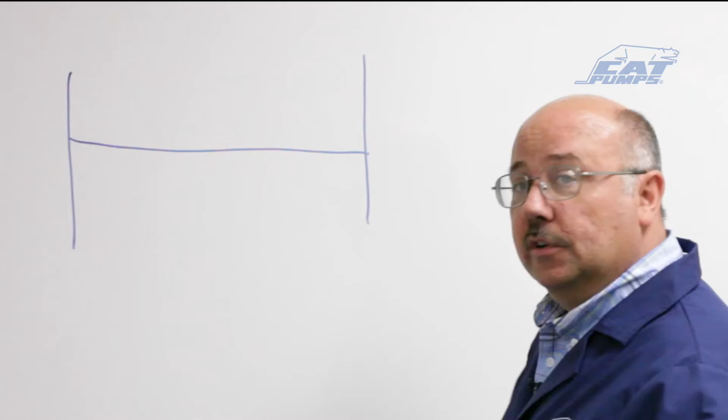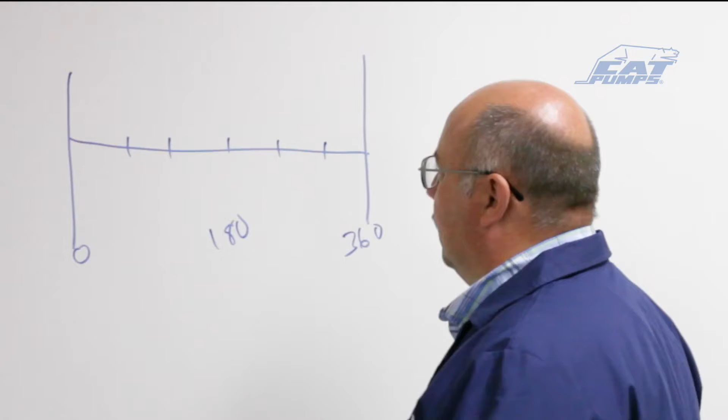I'm going to draw a representation of one revolution of the pump crankshaft. So we go from 0 to 360 degrees. This is 180 in the middle. Draw some marks every 60 degrees. And so we're going to look at the first plunger.

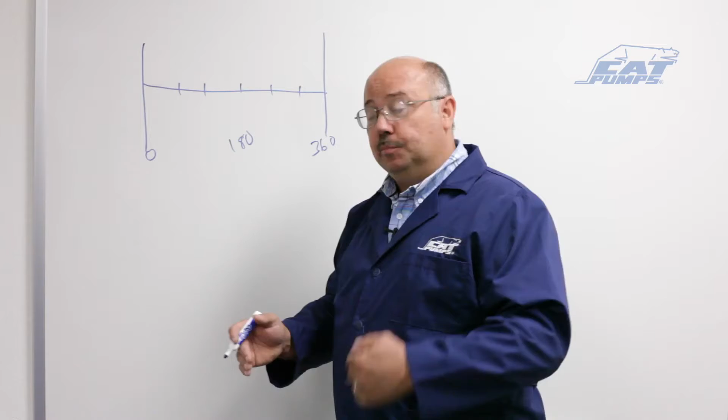When a plunger starts out on a reciprocating pump, it's at 0 speed. And then halfway through its forward stroke, it's at its maximum speed. And at the end of its stroke, it's at 0 speed again. So the curve of the output will look like that. And that's the forward part of the plunger.

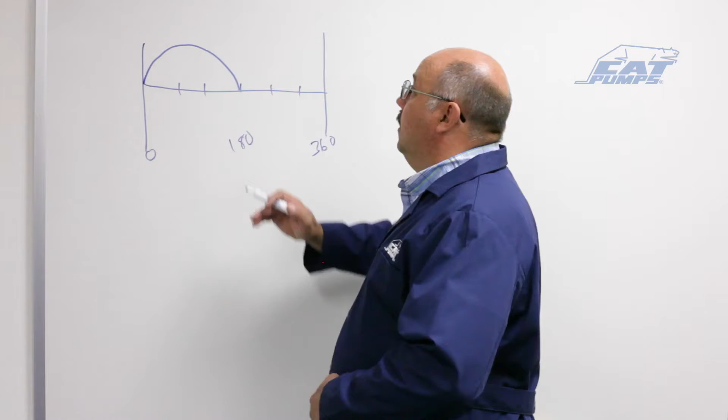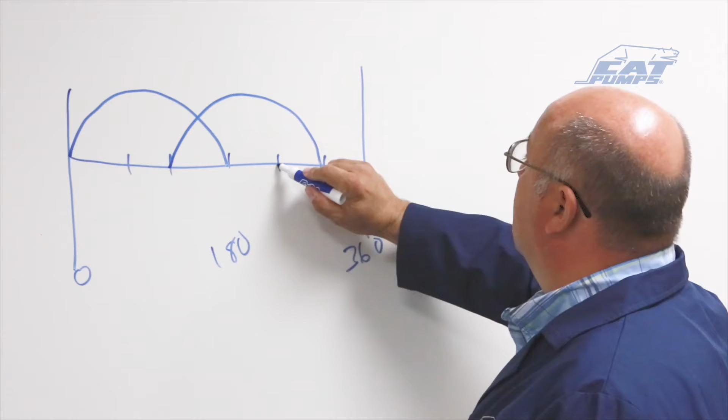This is the return where it's bringing fresh water into the chamber. And we're only interested in this scenario with the output of the pump. So one plunger has output like that. Then let's look at the second plunger. It starts 120 degrees offset and has a similar output like that. Now we'll look at the third plunger, which starts 120 degrees after that and has a similar output. That's what the output of a reciprocating triplex pump looks like.

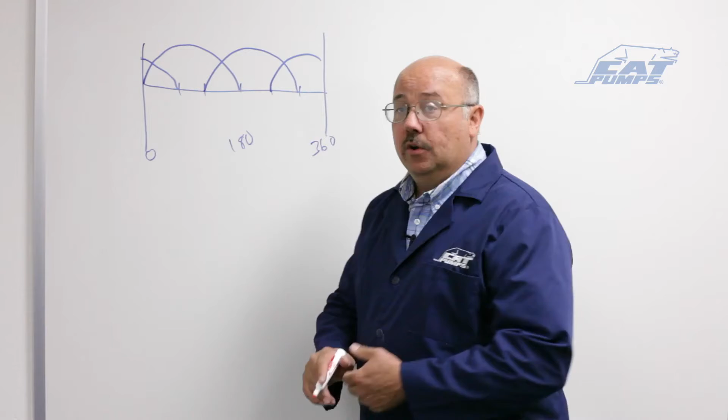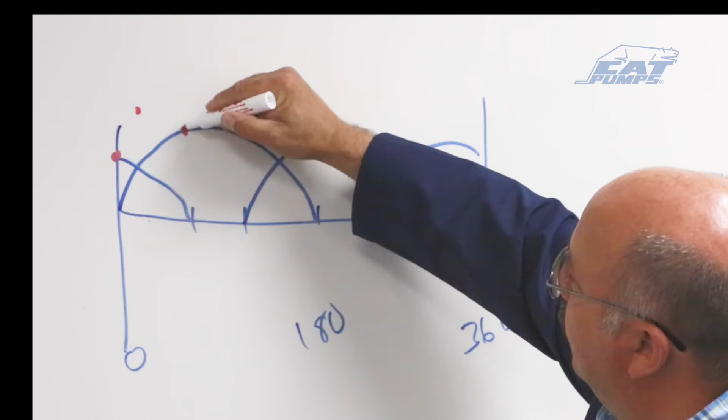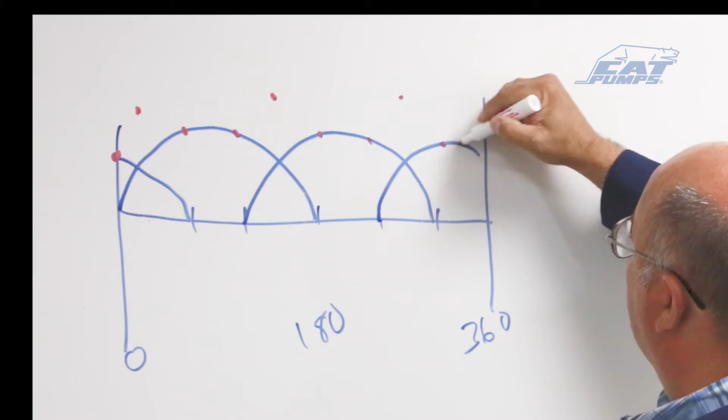Now, to get a true picture of what's happening, we're going to add what's happening at each moment along here. At this point, only one plunger is going forward, so there's this output. At this point, two plungers are putting out the same amount of output, so we add those. Here, only one is putting out, so it follows this curve from there to there. Again, here it adds. Follows along, adds, and follows along. So the output of the pump actually looks like this.

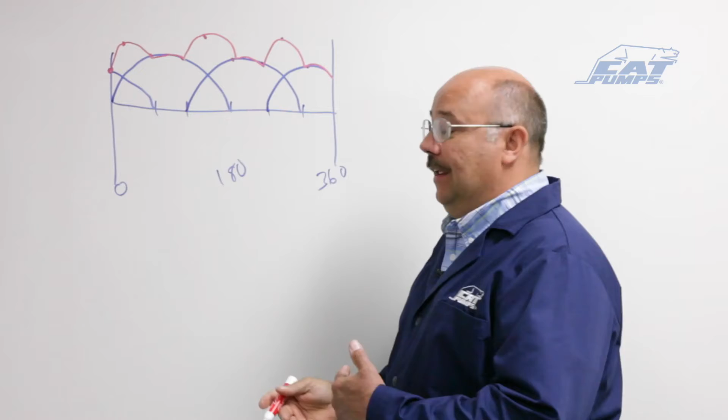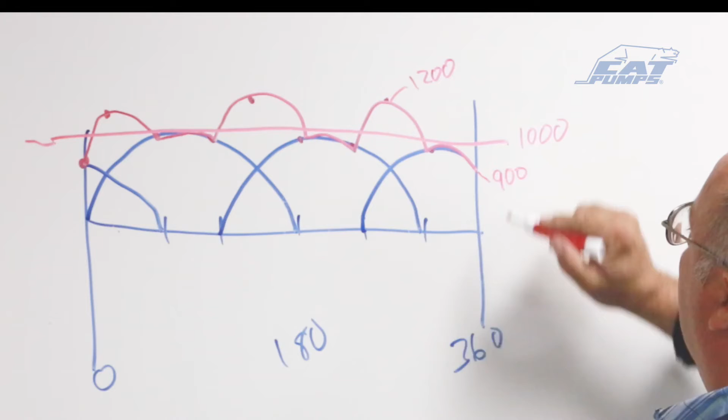As you can see, that is a pulsation curve, because if we're running at 1,000 psi right through here, we're seeing peaks up here of possibly 1,200 and valleys down here around 900 psi. So in one revolution of a pump, we have 3 peaks up to 1,200 and some valleys down here at 900 psi. That's very erratic pressure. And it also represents the flow coming out. And so it's very erratic. And what we want is something a lot more smooth than that coming out.

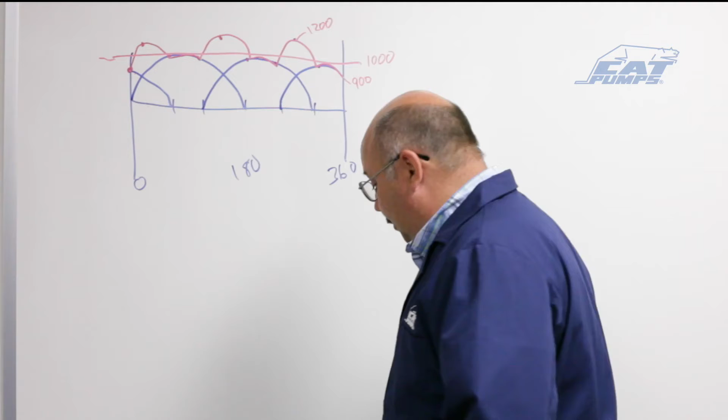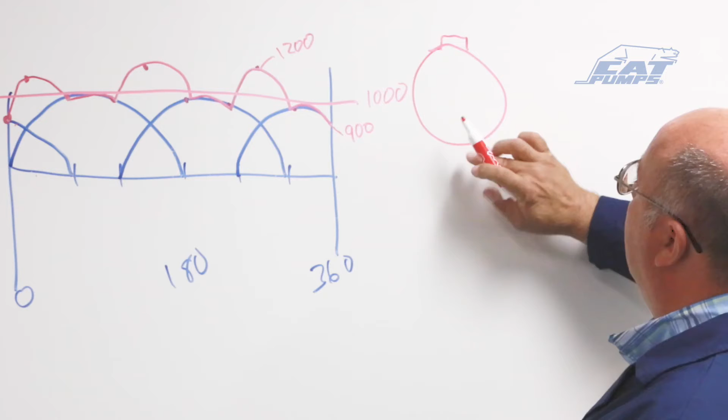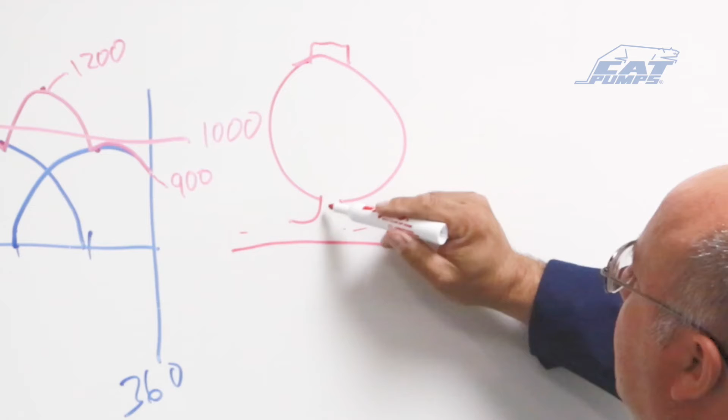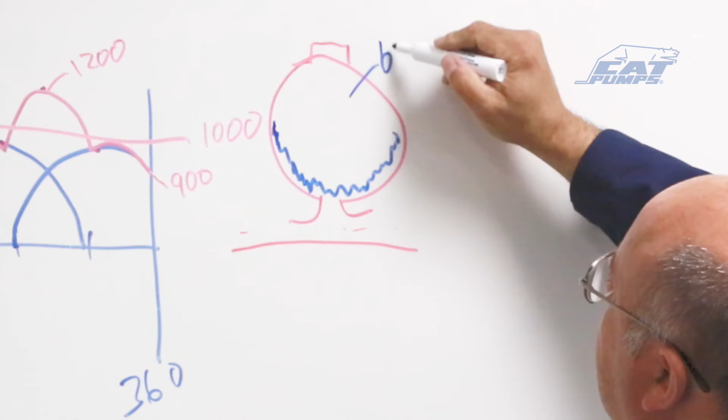So we introduce what we call a pulsation dampener. A pulsation dampener is basically a device that's spherical in shape, has a nitrogen charging cap, it's open in the bottom, and we put it in line. So this pulsation that's coming from the pump is coming through this piping and hits this dampener. The dampener will have a nitrogen charged bladder in it at about 60% of operating pressure, or in this case 600 psi in here. And when this pressure is in here, it holds the bladder to the bottom at 600 psi.

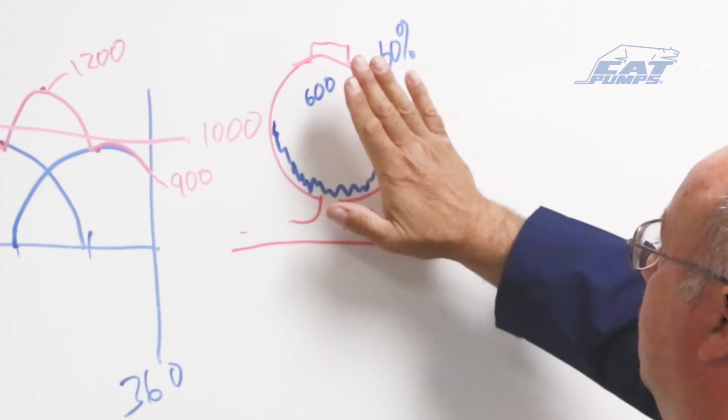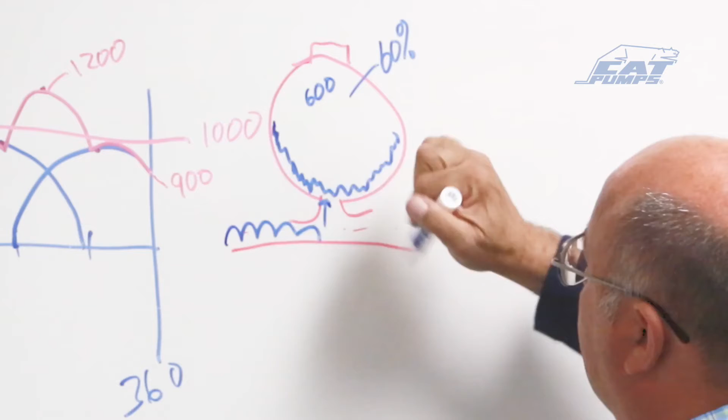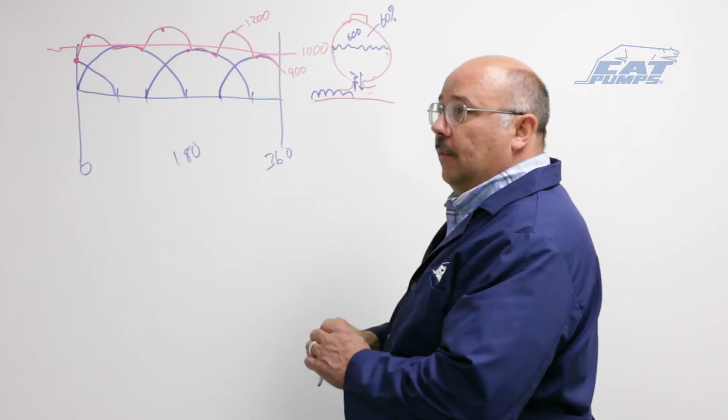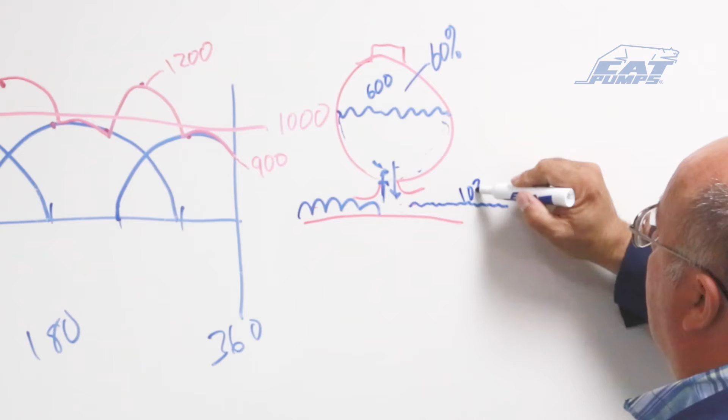Now we come in here with our 900 to 1200 psi ripple. It energizes here, pushes the bladder up to this position. So now we have 1,000 psi on both sides. And this ripple is coming in and going out, and the bladder reacts to that. When a spike comes up, it goes up a little bit. When a valley comes in, it comes down a little bit. So it compensates this flow and gives you a much more smooth output. Possibly a range from 1,030 to 970. A nice smooth ripple of flow, and that's how a pulsation dampener works.

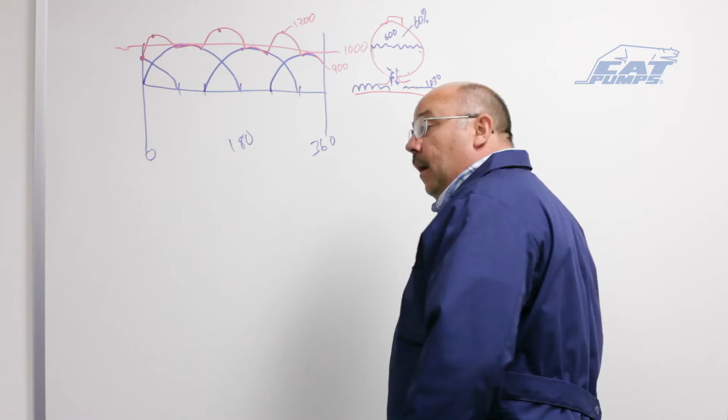Now, how do we put it into a system and what effects will it have on that? We're going to show. So I'll clear this.

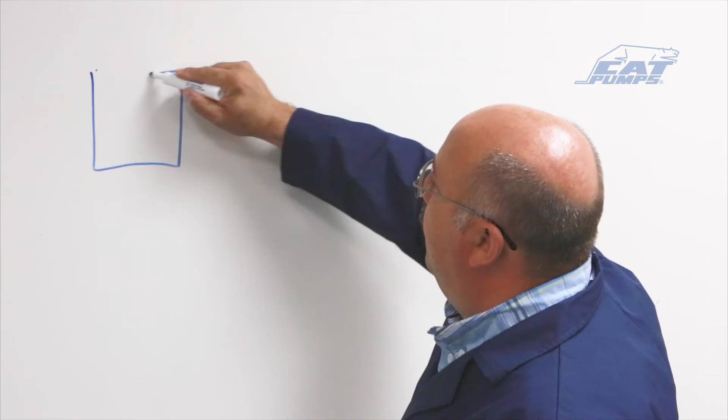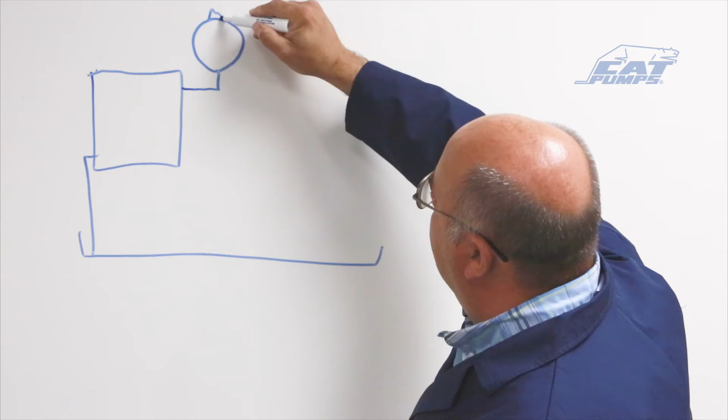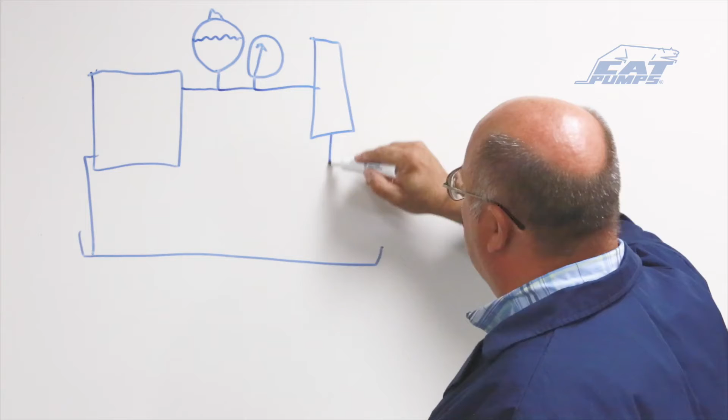And we're going to draw a pump here that's drawing up out of a reservoir. The discharge piping is coming along, hits our dampener, with the pre-charge, and a lot of times there's a pressure gauge in your system, and we'll have to have an unloader valve in our system that bypasses back to tank, hose, trigger gun, and spray wand.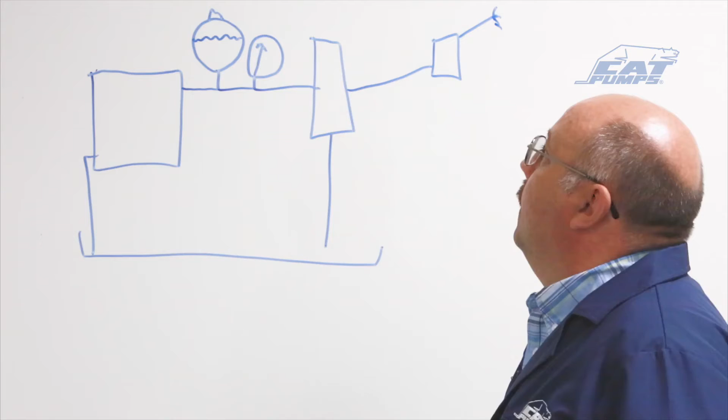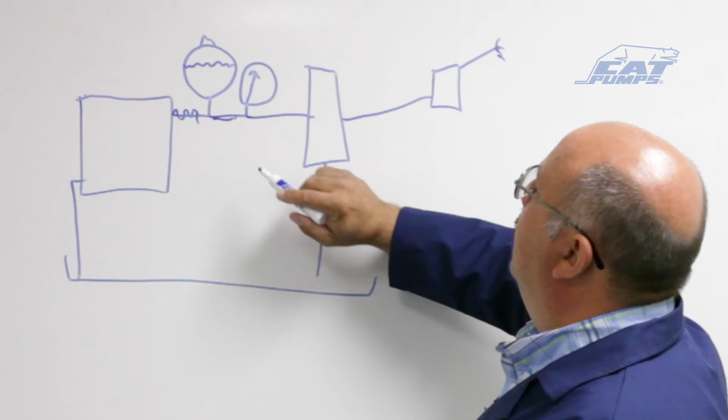This is what a typical system could look like with a pulsation dampener in it. So again, the water's being drawn out of the reservoir with the pump. It's putting out this rippled pressure. Now we got smooth after the dampener, and what it does is the gauge, the unloader, the gun, the hose, everything is seeing the dampened pressure pulsations, so it's a lot smoother, and the regulator wouldn't be trying to react to this pressure wave.

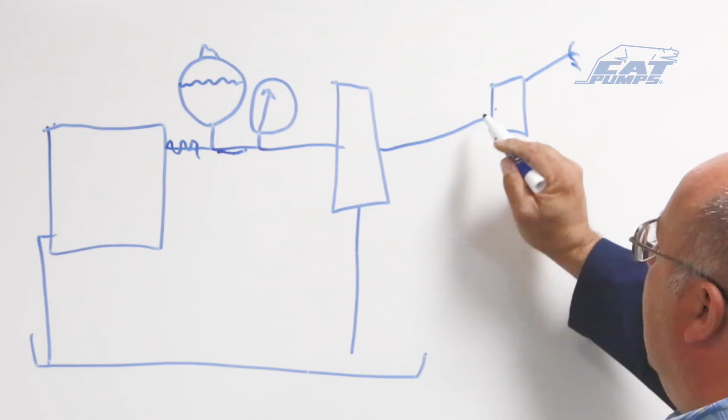If we take the dampener out, now we have the pressure wave getting to here, and the gauge is going to be vibrating more, the needle will be. The seals and piston in this unloader are going to be trying to compensate for this, so you get a lot better life out of your accessories and gun and hoses and fitting connections if the pressure is smooth as a result of putting a dampener in your system.

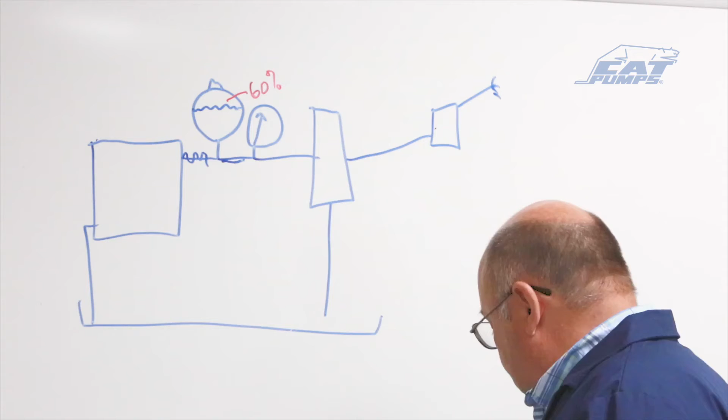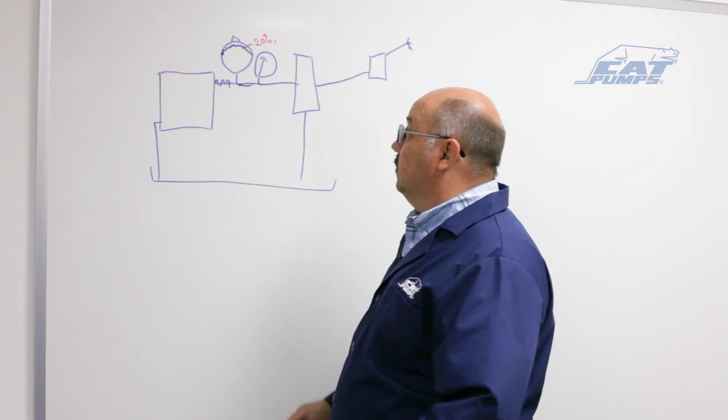And this is how this system can look. Now, there are different ways to plumb them and things to watch for when using a dampener. The first thing to be cautioned at is you want this charged per the manufacturer recommendation, which is usually around 60%. Now, if we were to not do that and pre-charge it at, let's say, 20%, then the bladder, when it's in operation, will be deformed all the way up here and could lead to early bladder failure and fatigue. So then the dampener would lose its effect.

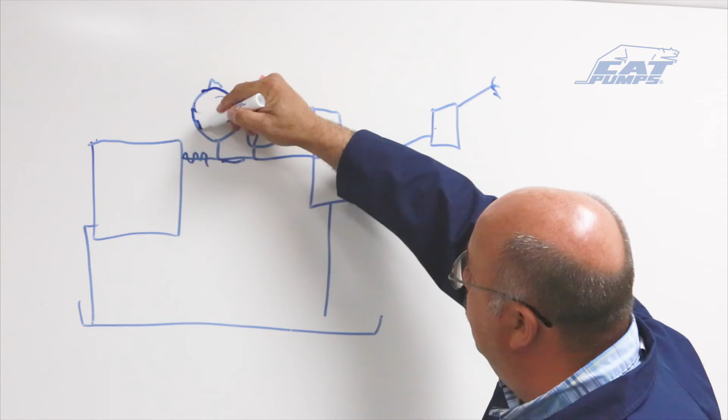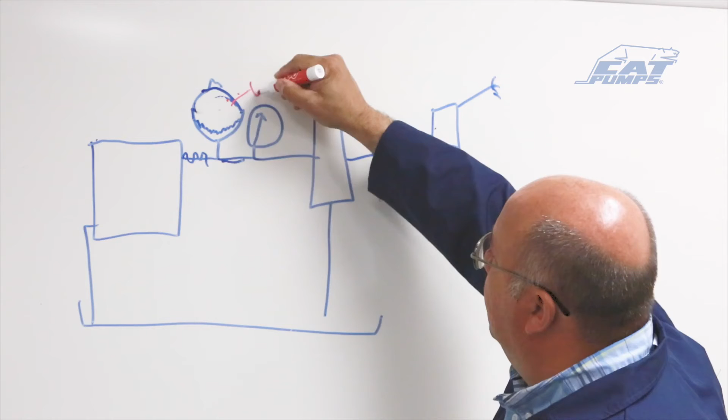If we were to charge it at 90%, then the bladder would only move to here during operation and would have very little effect in dampening the pulsations in your pressure line. So again, follow the manufacturer recommendations of approximately 60% pre-charge.

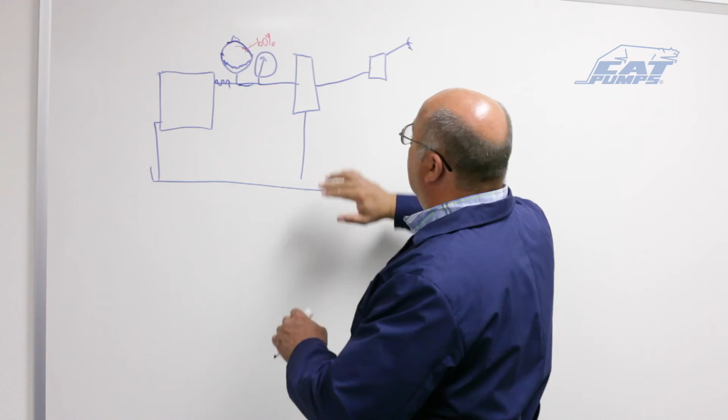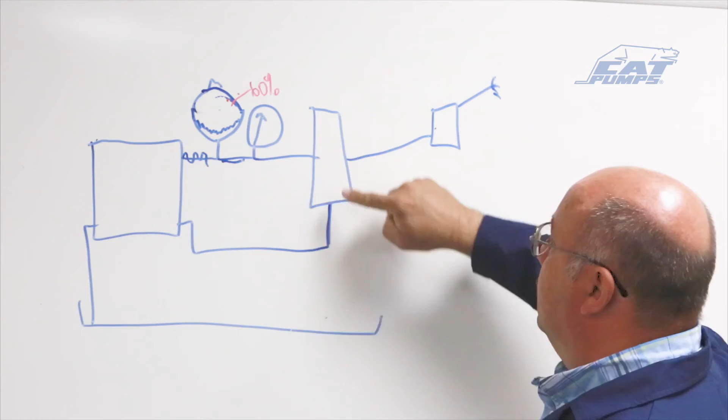All right, this again is one way that it's plumbed into a system. Another way is this bypass line is sometimes routed back to the inlet of the pump so that when you shut the gun off, the water just circulates in this bypass loop rather than taking a second line all the way back to your tank. And this is, for the most part, a good way to do it.

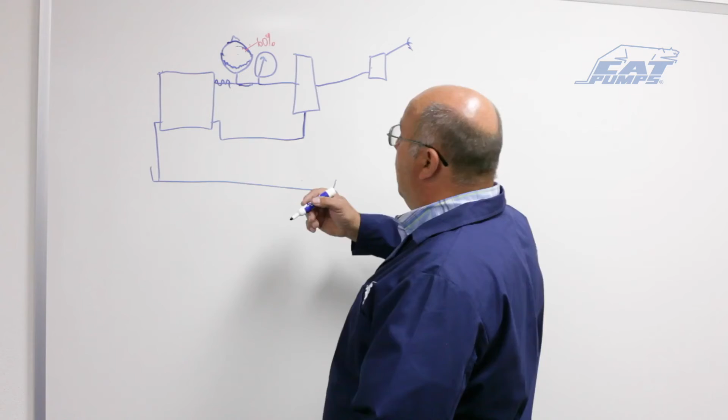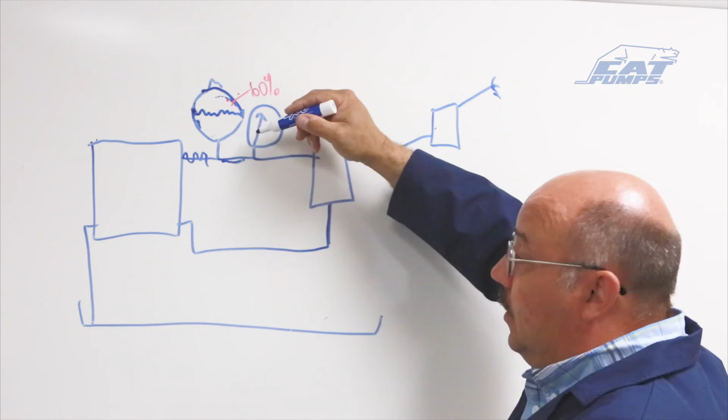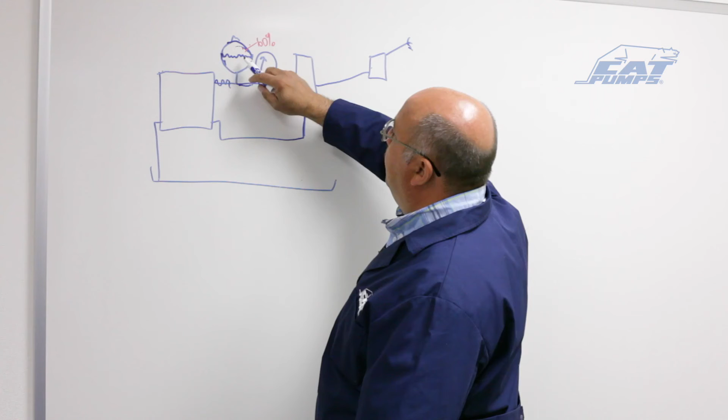Now, something to remember is when this happens, when we were at 1,000 psi with the gun open and operating, there's a volume of water in this dampener that, when we shut the gun off and it unloads, escapes out of the dampener because the bladder will push down with the nitrogen charge and it'll empty the bladder, or empty the dampener.

So this flow then will add to this loop. Well, where is it going to go? You're adding a volume of water into a closed loop. Well, what happens is the extra volume of water will work its way through the pump and go back into your reservoir, which is okay. It causes a little bit of pressure spike in this line, but not a lot.

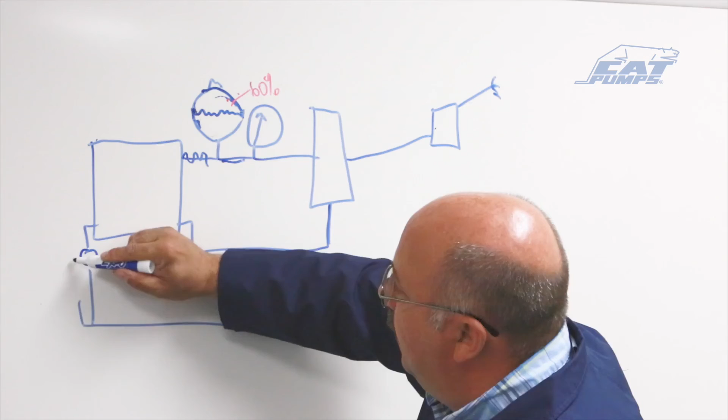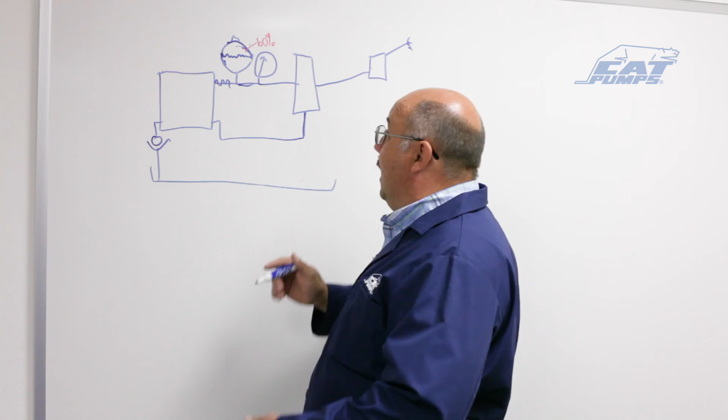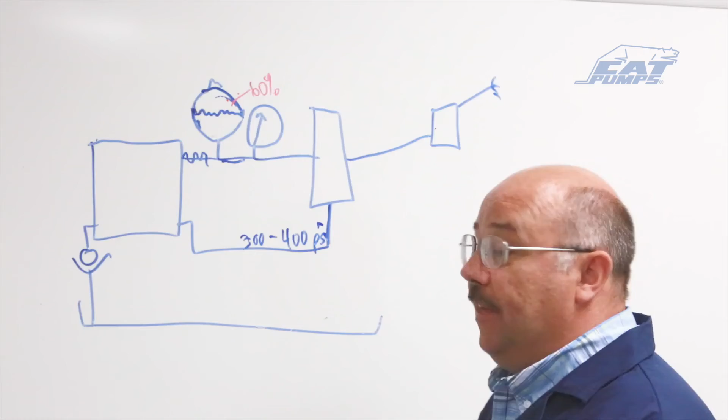But what can further happen is, in the systems, sometimes there's regulations where you have to have a check valve here. Now, this volume of water will get into this loop, but it has no way of escape. And water's not compressible, so what's going to happen is you're going to see an increase in pressure in this bypass line, maybe 300 to 400 psi. And if that happens, this pressure also goes through the inlet of your pump and can take out the low pressure seals and be very detrimental to the lines, because usually these are low pressure lines.

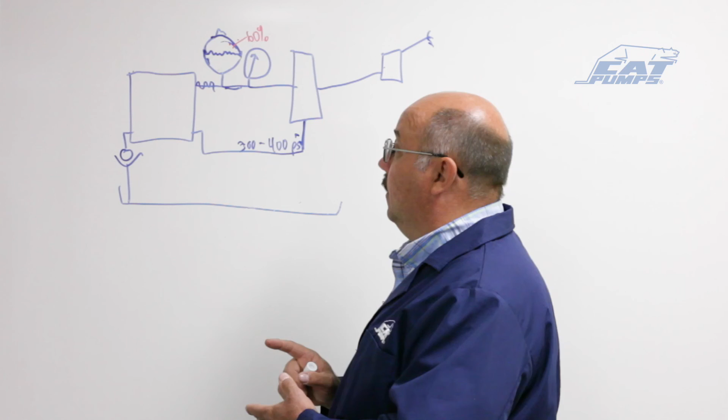And that is why we recommend following the two recommendations of bypassing back to tank whenever possible and keeping your pre-charge at the 60% manufacturer rating.